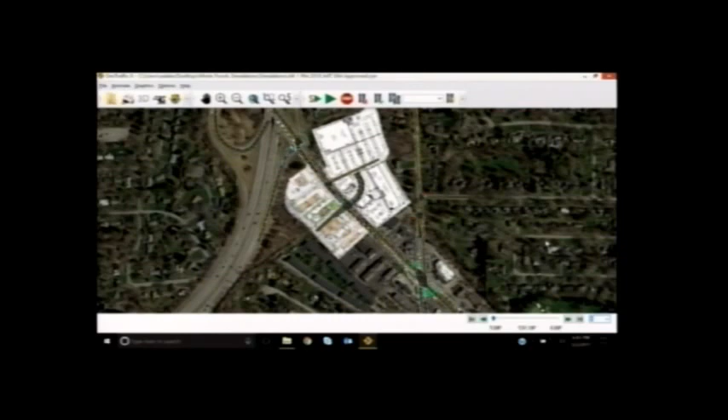What this model represents, again, is the worst case scenario. It also represents a fully improved corridor with all of our proposed mitigation, including traffic signal, traffic coordination, and things like that. Just to put it in perspective for everybody, here's Monroe Avenue.

This is Clover Street. These are the cars here. Again, we can zoom in on this a little bit closer so you can see them. I was going to ask you to do that, Jess. I think it's still— you can.

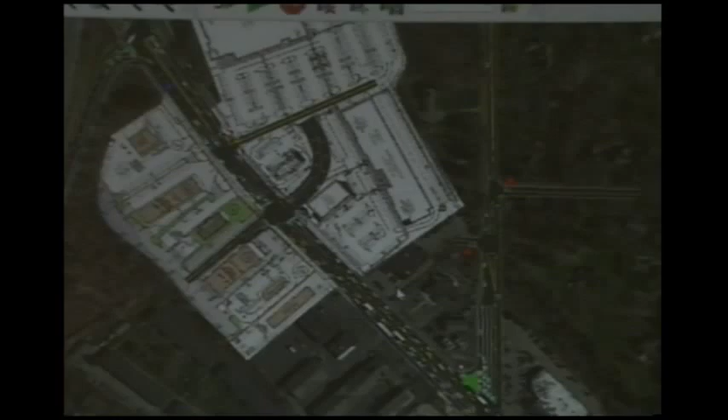This is our proposed entrance that comes into the Whole Foods Plaza. This is a proposed signal light, which we'll talk about in more depth. And then this is our second entrance out, which is a right out onto Monroe Avenue and also a left in. So this is showing you how the traffic will actually work once this plaza is built.

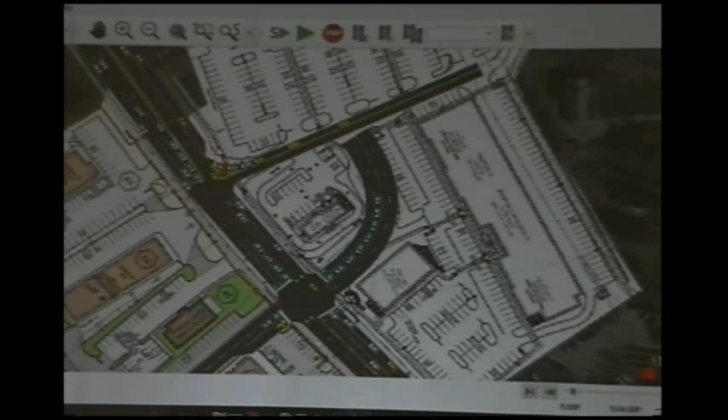Before you just say, all right, meeting over, I'll take your word for it, let's go through how we got there. So again, it all goes back to this malfunctioning signal timing. And I want to talk about what that really means.

Amy, we have a video from August 18th of 2016 of what it actually looked like. Just make sure you grab the movie file there, not necessarily the image.

So this is back in August 18th of 2016. We are starting to see some backup in this corridor. At this point, we have a malfunctioning traffic signal that is only providing 40 seconds of eastbound green time. So these folks here are only going to get 40 seconds. And what that leads to is ultimately this backup, and the reason for that is it only allows about 40 cars to get through that movement of the intersection.

What I'll talk about a little bit later, when you actually use the correct signal timing, you get closer to 63 to 65 cars able to get through that intersection. And that's just in one two-minute cycle, actually a minute and a half in this case.

When you apply that 20 cars per cycle that aren't able to move through here, the result accumulates. 20 cars this time, 20 cars next cycle, 20 cars next cycle. So it results in 800 cars during the actual peak hour that are not able to move through this corridor, and 800 cars is a lot.

Do you have a question, Mr. Supervisor? I just wanted to clarify when you say about 40 as opposed to 63, are you talking about just the eastbound movement on Monroe Avenue? Yes, sir, just the eastbound movement.

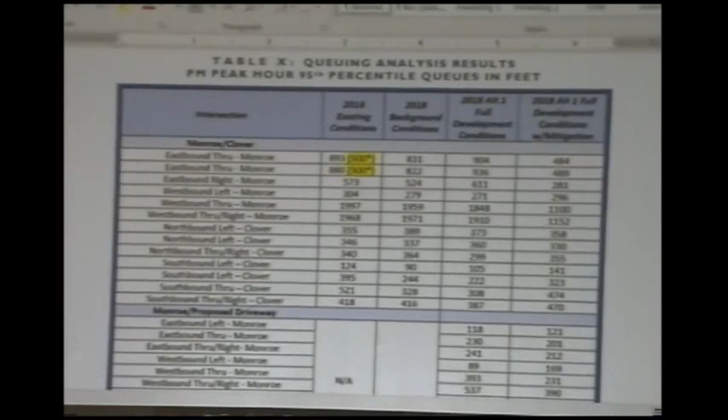So we go from 500 up to 900, but with our mitigation - which has signal coordination, the addition of the signal light, all things I'm going to talk about later - we have a very similar, and actually lesser, queue in that area. And again, that is at 5:18. It was drilling down to the minute.

So what we're doing here is trying to verify every way possible that this model is correct, this model is correct, because everything we go from here is going to build off this baseline condition. And the baseline condition was really the crux of the whole discrepancy back in 2016. So it was of the utmost importance that we made sure this was right.

So eventually it was agreed upon by the town's consultant that we did have all the correct parameters and we were representing the existing conditions correctly with our model. So what that allows us to do, I'm sorry...

Jess, I'm sorry, my eyes are straining to see these numbers. You referenced the 500 number with the asterisk in the 2016 existing conditions. Can you explain, because next to it are numbers 893 and 880, and then background condition numbers? I want to make sure everybody understands what those numbers mean, since that chart is in your SDEIS.

Mr. Supervisor, this is yet another example of how conservative our model actually is. The existing conditions model says you're getting queues out there of 900 feet, but when we go out and count them, we consistently count 500. So Synchro and SimTraffic are very conservative when estimating queue lengths. It estimates 893, when we actually physically monitor it day after day, it's really closer to 500.

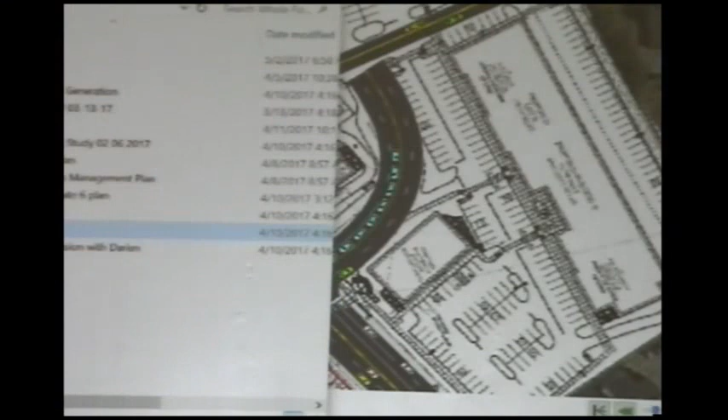So trip generations - how much traffic does our project generate? There's a very long and detailed explanation of exactly how we get to our trip generation number contained within the actual SDEIS. But really the best way to figure it out, and Amy will tell you this, and I'll tell you the same thing - if you really want to know what one of your proposed uses is going to generate, go find the most similar use in the most similar environment that exists today, and go count how many cars are going there.

What we've used in the traffic impact study is the Institute of Transportation Engineers manual that has set rates - there are 3 manuals, so every single use you could dream up has set rates, and that's what we've been using. One of the questions that came out in the review of the DEIS, I believe from several council members, was: I know you got this chart from this manual applied across the entire nation, how do I know these numbers are actually going to be accurate? How do you verify these?

So what we did, working with Whole Foods - and Whole Foods actually had some input on this - we said, where else do you guys have a similar environment to this? And they said, go take a look at Darien, Connecticut.

If you pull up the aerial, now we're in Connecticut, so I'm sorry if everyone north-south just got thrown off. This is the Connecticut Turnpike here, and this is a main commercial corridor that cuts right through this. And here is what's important, a standalone Whole Foods store.

Some people have said to us, well, what about the one they built in Albany 2 or 3 years ago? Well, that's in the middle of a plaza, and there's no way to actually determine how many cars are going to just that use when everyone's using the plaza. It's like trying to figure out how many people go to Black and Blue down at the Pittsford Plaza. It's tough. But what we try to find is, what's the most similar? In this case, we have very similar demographics.

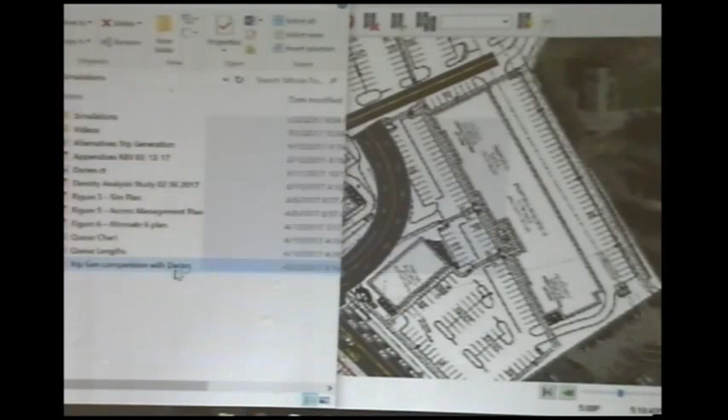So let me show you the next step here. All right, this chart's important, so I'm going to spend a little bit of time on it.

Jess, if I might, in comparing Darien to Brighton here, what about mass transit and public transportation in Darien versus Brighton? Is that taken into account? It's taken into account in terms of a lot of similar opportunities for mass transit, but not used like it would be in a more urban environment.

One of the things that was suggested to us was, why don't you go look at Wegmans on East Avenue? Well, when you start to get into those more urban environments closer to city centers, mass transit is used a lot more. One of the reasons why Darien was more appropriate was because it wasn't directly next to a large urban center. It also wasn't super rural either. So its proximity to really metropolitan areas played a role in our selection, because of things like mass transit, pedestrians, and so on. So in that sense it was.

Public transit would be similar then? Correct. To what we have in Brighton. And used at a similar rate, more importantly.

So this top category is the trips that were generated by our proposal, used in our traffic impact study based on the ITE manual. So we say we have a 50,000 square foot store, then we have AM, PM, and Saturday peak hours. During this presentation, we focus on the PM peak hour because that's really the worst case scenario.

That's when you have all the commuter traffic built in, but the study includes an analysis of all of them. So if you want to look at Saturday or the AM, it's not as exciting because there's nowhere near as many cars on the road, but we can certainly do that. We want to be looking at when the most cars are on the road, not necessarily when our project's using the most. But all of that is included in the traffic impact study.

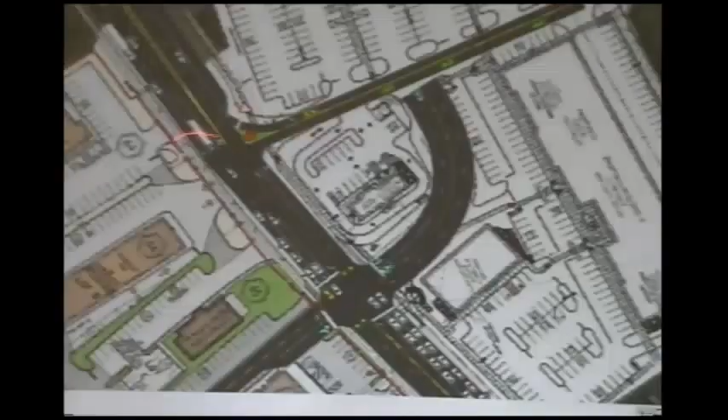That's going to help the entire corridor all the way up to Westfall to make sure traffic is flowing much more smoothly. This area represents the introduction of a traffic signal. As was the case with the original DEIS and continues to be the case, the project meets the traffic volumes for signal warrants, so a signal is warranted to allow safe passage of vehicles into and out of the site in a controlled environment.

A year or so ago, when you had Mario's Restaurant, Clover's Lanes, Mama San's, and the other uses that were in there, if you were to actually do the study and look at the amount of traffic they created - and this information is included in our TIS - they also warrant a signal. So this signal has always really been warranted for the safety of these folks, and continues to be the case.

What you see here is our revised access point that comes into the site. It's got a full 2 lanes coming in and a full 2 lanes going out. One of the things we've done, and I'll spare you a great amount of detail, is we've eliminated a lot of these internal curb cuts that once existed from the original DEIS.

That basically ensures we don't have an internal gridlock scenario. There used to be a curb cut right here into this pad site, so if you were coming in here and decided to take a left, and this car had to wait behind you, and they had to wait behind you, and then these guys were backed up, you could create a gridlock situation. We've eliminated that to make sure there's a much smoother traffic flow interior to the project.

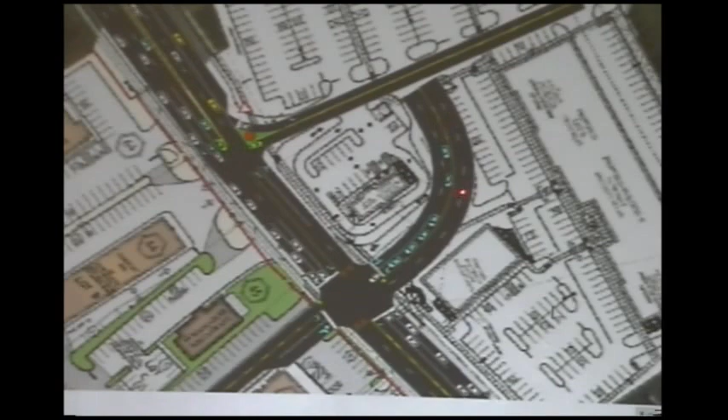Jess, can I stop you there for a moment? Absolutely. Looking at the numbers on the right, I take it this is at about 5:38, 5:37 on a weekday. More or less correct.

For over a minute, as I watched that simulation, and continuing now as you continue to roll, I have not seen a single car come into the left turn, the signalized left turn, to turn into the Whole Foods here, in that lane, correct? That's a good segue to talk about our access points, if you don't mind.

I'm going to get there, although it might be a touch indirectly. For starters, I just want to point out, this goes without saying, it's represented in our documents: these are only 2 access points. There's no proposed access to Clover, and there's no access going up to Allen's Creek. We've represented that before, and that continues to be the case.

We talked about this position, this access here. What we have here is a right in or a right out, so you can't take a left out of this project. We're going to talk a lot about how dangerous unprotected lefts are, but you can take a right. You can also take a left into the project here.

One of the reasons why - there's a lot of conversation with the DOT where they said, why wouldn't you just prohibit lefts here, don't let them go here, and make them all use the light? Well, the reality is the gaps created off of this light are ultimately utilized, and these folks get a chance to make a left-hand turn into here without having to travel all the way down to the signal light. So if you're looking for them to take a left here, one reason you may not be seeing them is because a lot of them are escaping and taking a left in up here.

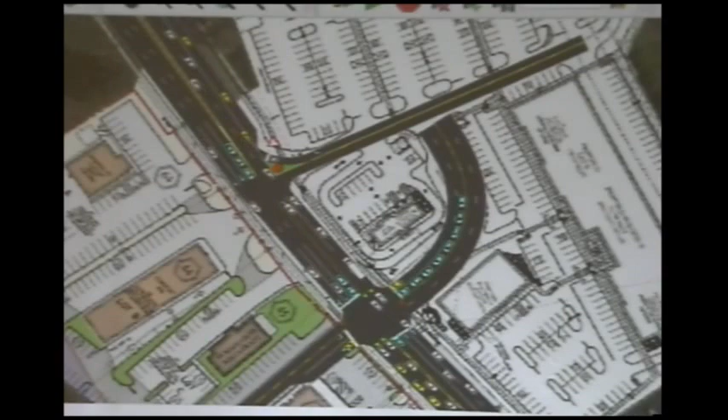So I don't know if you can zoom out for a little bit, Amy. One of the things I want to point out here, one of the main things that's been called and referred to, and it really is an amenity, is the development of an access management plan. I just wanted to reiterate on that.

What the access management plan is, and it was originally presented in the DEIS and continues to be proposed as part of the SDEIS, is the introduction of cross-access easements and drive lanes for all of these properties on the south side of Monroe Avenue.

And the situation that you have now, if you remember earlier, there was a car that tried to slip out and take a left. Well, what you have is all these uses right now, what used to be Friendly's and now is going to be a City Mattress, Socorro Home, Dunkin' Donuts down here further, but all these different uses have uncontrolled curb cuts.

So everyone, if you want to take a left, you sit there and put your blinker on and you wait and you wait, and then you try to shoot the gap when you can. And if we were even to try to model that in Synchro, we never could, because real life drivers have a lot more courage than our little simulated drivers here.

So what the proposed access management plan does is it proposes significant construction improvements to allow all of these five properties here on the west side, which we're calling phase 1 of the access management plan, where we actually have signed easement agreements, part of the DEIS and the SDEIS, giving the ability to say, okay, if I want to take a left turn, I can go over to the signal light, wait for that to give me a green, and then take a left without having to try to get through these gaps. So that's very important. That cuts down on the amount of really dangerous traffic movements.

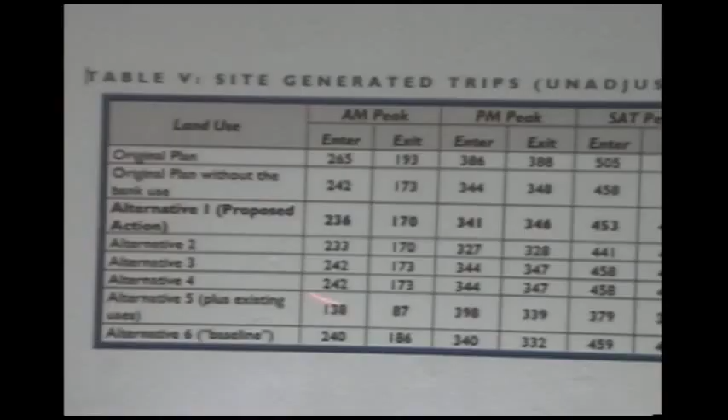Right now it's being referred to as the baseline. When you read through the SDEIS, both council members and members of the public that are here today will see Alternative 6, the baseline, which is really what we could build in this district given the density requirements of 70,040 square feet. What I'm going to do is pull up a site plan, which you're going to notice looks remarkably similar to our proposal, just to show you how similar they actually are.

Even here, when we look at the trips, 341, Alternative 1 is our proposed plan, versus 340, 346 versus 332, 453, and in this case higher, 459, 456 for 4.

All these numbers are showing you that when you go up 20,000 square feet, the resulting amount of traffic generated by this project is not substantially different. So if I'm not exactly in favor of this project, I'd say, how can that possibly be? That's crazy. Well, it goes back to the types of uses being put in there, and the fact that we're not putting in the highest trip generators. Does Whole Foods generate more traffic than a mattress store? Yes, it does. But it's still not the really big high trip generators.

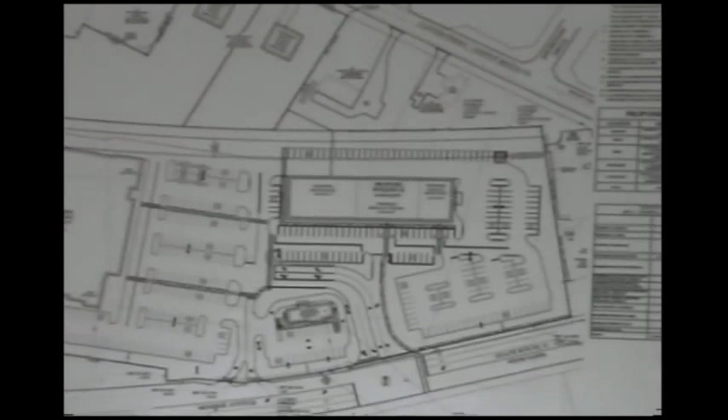If you pull up the site plan there. So this is our alternative plan included in the SDEIS. This is our baseline condition, what was analyzed. We've adjusted the site plan, actually moved things. We still have a 50,000 square foot building as a grocery store. We've jostled it around so it meets all the setbacks.

What would this look like if we actually applied the BF1 setbacks? For starters, this building can't be up close to the right-of-way, which in a lot of urban planning we want, buildings closer to the right-of-way with parking in the back. But if you just apply the zoning as is, you move this building back, the pad site, you move the 50,000 square foot building back, you still have the pad site. Now you have all this parking out front, which you wouldn't necessarily want. We still have our building back here, smaller than it was.

But then when you look at the different uses this could be—whether a restaurant, a bank, a bowling alley—those types of uses can all generate more traffic. So that analysis is provided within the SDEIS. That's actually a more thorough analysis than was initially presented in the first DEIS.

Really the intent of this plan was to say, if we weren't allowed to have more than the density requirements—or if we found through this process that it wasn't appropriate—what would be the next logical proposal? This is that next logical proposal, but it doesn't get you the access management plan, the coordinated signal timings, or a lot of the off-site pedestrian upgrades we're proposing. But it is the baseline condition we were required to analyze as part of the scope of the DEIS.

Jess, can you describe what assumptions were made about the uses for the pad as well as for the retail building? I presume the retail building would still be a Whole Foods. Yep, that's correct. And the pad out front would still be what we call a quick turnover restaurant—a Starbucks. My understanding is the applicant has a lease agreement with Starbucks, so yes, this is still planned as Starbucks.

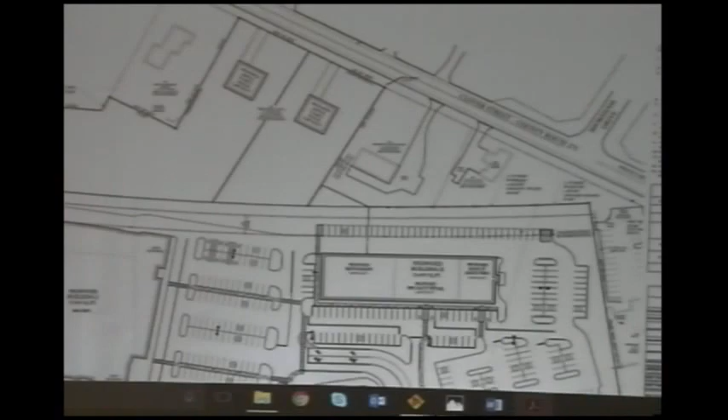Okay, can you zoom in on this, Amy? Then we looked at an end cap restaurant, comparable to—actually smaller than—the Mario's that was once there, very common for these types of plazas. So we looked at a potential end cap restaurant, and then a small bank with a drive-through on this side. In the middle, it continued to be the same retail proposed for the entire building as part of the application. So we swapped out, or looked at, a restaurant and bank that are still relatively small—an 8,000 square foot restaurant is pretty small, a 4,000 square foot bank—instead of just applying the retail component to that part of the plaza.

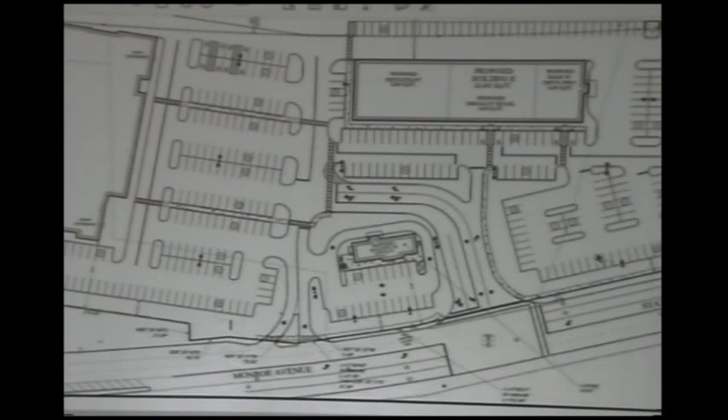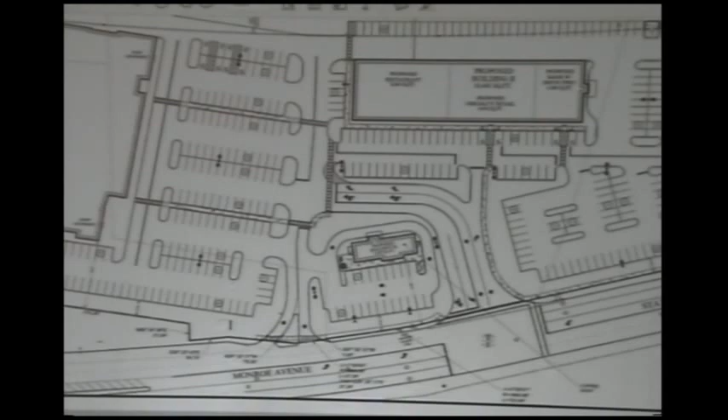Going along, one of the other things included in the SDEIS—pardon the quality on this—we looked at whether it's unreasonable to ask for 19,600 square feet more than what's allowed by code, given the amenities we're asking for. One of the things we started to do is look at our surroundings—is this compatible with what else is going on in the corridor, with other land uses and developments that have occurred? Amy, can you bring that up and scroll through it real quick?

What size is that Whole Foods? Same size, 50,000 square feet. The Whole Foods building footprint is exactly the same.

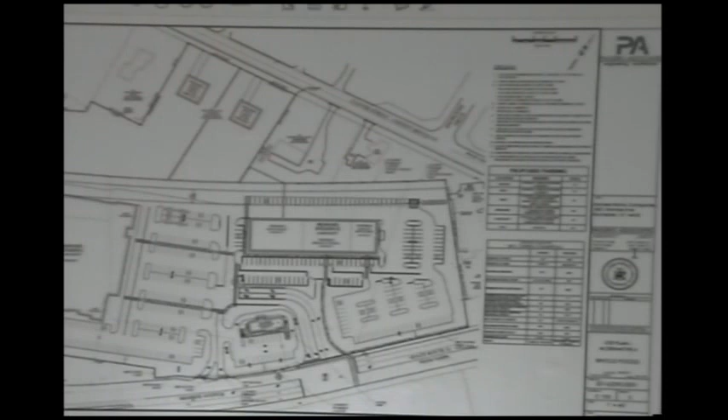We just moved it back and around to meet the setbacks. There's a building here that was eliminated, and we still have that there. So again, it's not substantially different. 20,000 square feet on a 70,000 square foot project isn't like we're going from 70 and asking for 200. I think this plan does a good job of showing you that the project at the end of the day isn't substantially different.

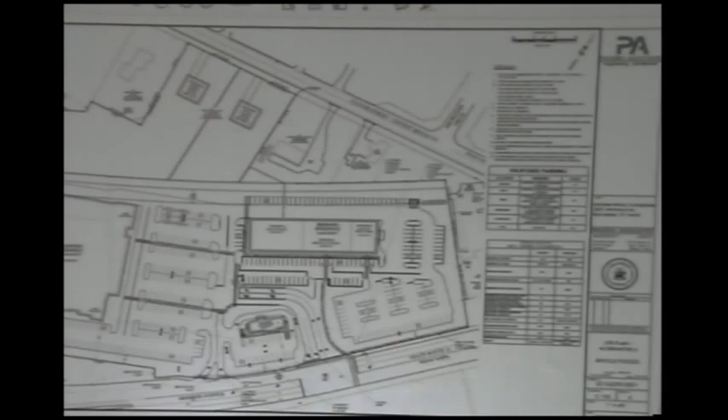One thing I want to point out, as some public comments noted, is that you would require a special permit to exceed 20,000 square feet in this zoning district. Yes, of course, we're fully aware of that, and that's why the special permit process is in place. As long as you meet those standards, a special use permit could be issued.

The scope of the DEIS does not say you need to analyze a baseline or alternative that doesn't require a special use permit. It says you have to analyze an alternative that meets the density requirements, 70,400 square feet, which is what this does.

We're not trying to say—most of these are pre-existing uses that have been there a long time. They weren't necessarily approved recently by this board, but it goes back to compatibility: what does our project look like in the grand scope of this corridor? The results are, I don't want to spend a lot of time on this, that we are consistent, in many cases less.

So that's basically the gist of the presentation. Just in conclusion, the real reason why we got into this supplemental draft environmental impact statement was the malfunctioning signal light at Clover and Monroe.

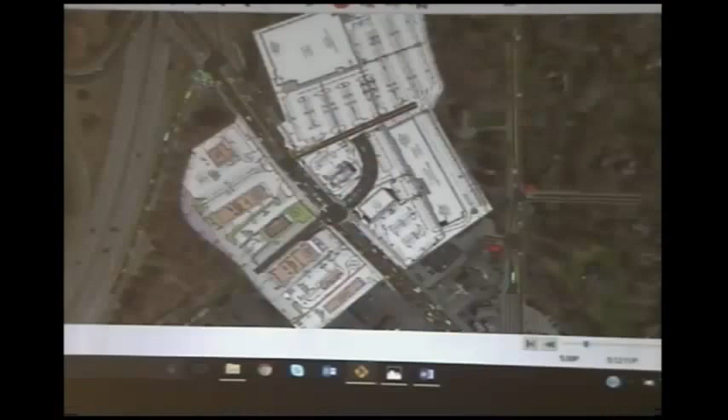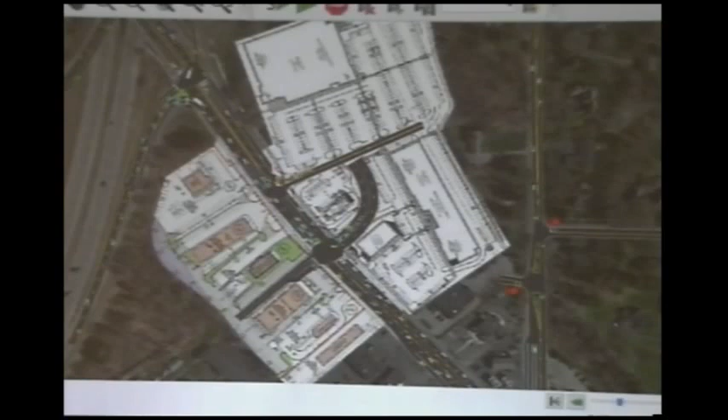We spent an exhaustive amount of time working with town staff and the town's consultants to make sure we really drilled down and nailed that baseline condition, including the state DOT. I think the end product, the revised traffic impact study, is substantially more accurate now that we have that accurate information, and now that it's experienced a thorough vetting of experts on both sides of the aisle.

I want to say again, time and time again, we have erred on the side of being conservative. We are looking at 5/18, the most critical possible moment to really analyze that and carry this across. Our simulations, which give us the results published in the TIS, are based on settings that say my car is going to stay at least 40 feet away from your car, and only travel at 25 miles an hour. Those aren't necessarily the exact numbers, but the settings were always erring on the conservative side.

That's why if you count the number of cars that shoot through with a 57-second green time, you're going to get somewhere around 56 to 58. But we know in reality it's really 62 to 64. Even with the lower, more conservative number, the results of the SDEIS still show it's operating at a condition that's improved compared to what's out there today.

A big part of that, again, is signal coordination, getting the corridor coordinated. I mean, that's big—you call it smart traffic, there's other names for it. But that's really an important part to making sure this thing functions effectively.

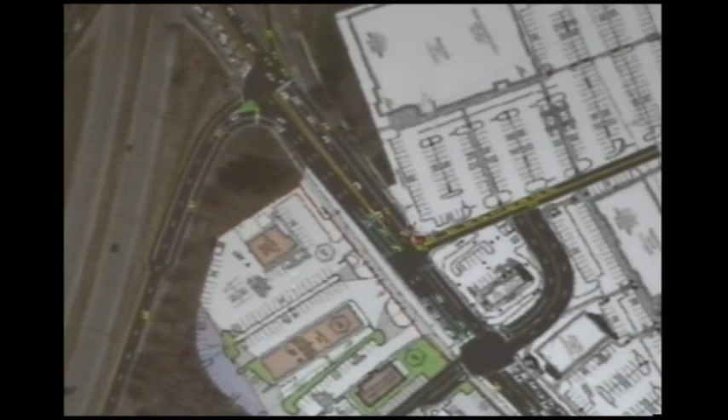Yeah, because I ask partly because, yes, I'm concerned about traffic flow on Monroe Avenue, but I'm very concerned, particularly based on some of the data in your original DEIS, although I know it is now mitigated somewhat through the change in your driveway configuration, but I'm also very concerned in making sure that people coming out of the plaza have sufficient opportunity to get out. And I want to see how that all works in this coordinated mode.

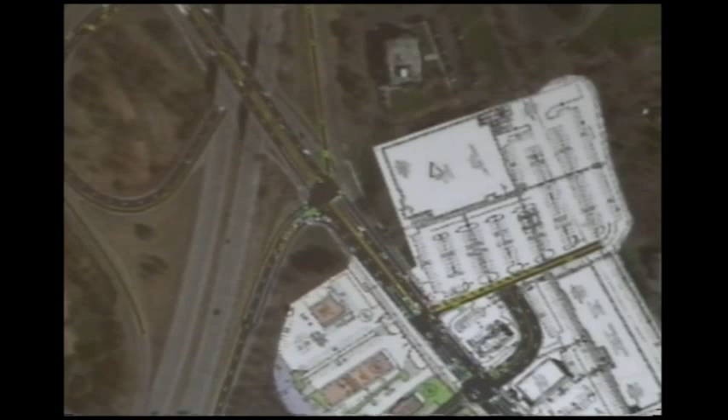Because based on the data I saw earlier, Saturday peak is really the most critical period, at least for some of the maneuvers. So the Saturday time period is higher for traffic exiting the site, but overall, when you consider the traffic that's on Monroe Avenue, the PM commuter time period is really the more critical peak when you consider everything and how it will operate. But obviously, we look at all three peaks, AM, PM, and Saturday.

In this, what you're concerned with, the traffic exiting the site is really more of a concern during the PM peak hour, because the eastbound traffic on Monroe Avenue is much higher during the PM peak hour than it is on Saturday. And it's more balanced on Saturday than it is during the PM peak hour. True. So we have a lot of eastbound traffic on Monroe Avenue in the PM peak and less traffic westbound during the PM peak on Monroe. On Saturday, those two flows are almost equal.

Yes, they are. Which makes the signal timings a little bit different during the two peaks, which is why we can coordinate the driveway with the 590 ramps on Saturday, and it's more preferable to coordinate the driveway with the Clover Street intersection during the PM peak hour.

Okay, if I can jump in quickly, as far as coordinating, now, you had said before that they're not coordinated now because the signal lights at the 590 interchange and Clover Street are too far apart, number one. And number two, the Clover Street cycling time is 135 seconds, whereas up at the 590 interchange, it's about 65 to 70. No, it's 80 to 100. 80 to 100, so they have to either be on the same cycling time or half.

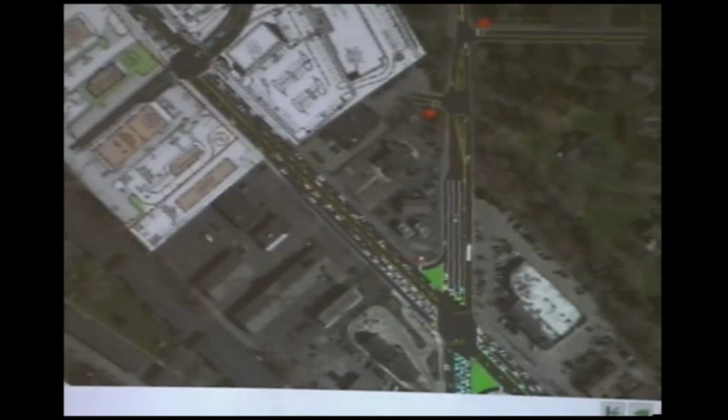So in the PM peak, which is really the concern for getting traffic out, because one of the concerns that DOT had, and I think the town had as well, is that traffic will back up on Monroe Avenue through the new traffic signal and not allow any room for traffic to exit the site onto Monroe Avenue, even when they have a green signal.

So the way we've coordinated these two traffic signals during the PM peak hour is that the traffic exiting the site will have a green traffic signal at the same time that the southbound Clover Street has a green signal. So what happens is, at that point, the eastbound traffic at Clover Street has flushed out to the point where it's not backed up to the site driveway, and there is space behind the queue on Monroe Avenue for the traffic to exit the site and fill into that space.

And then the next thing that happens is that the traffic in the eastbound direction at Clover Street turns green, releasing that, and then clearing the queue out.

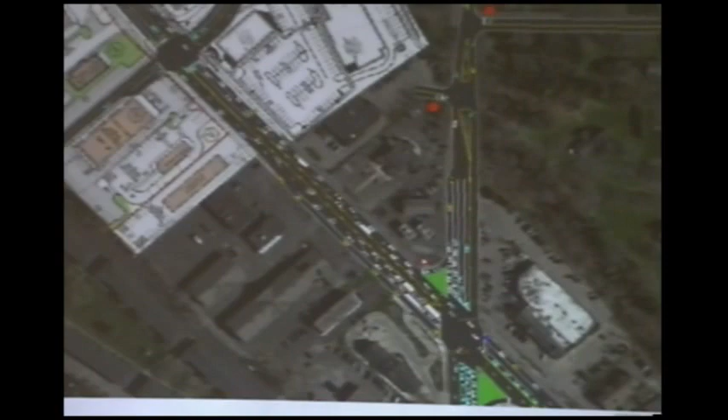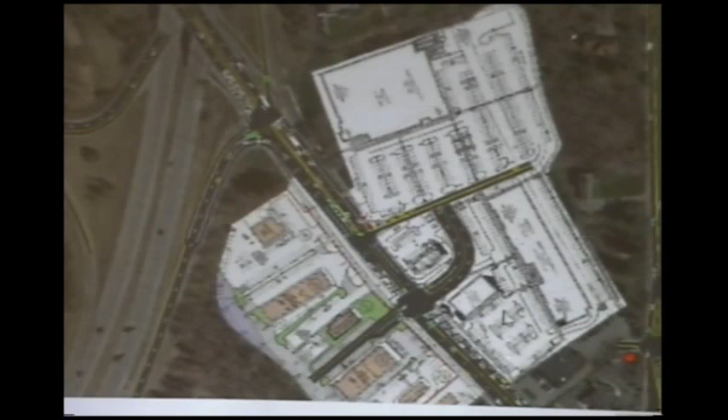Thank you, that's what I was looking for and I had gotten that explanation. Can you give a similar explanation of how the flows work on the Saturday morning peak when you coordinate between the interchange and the new signal? Presumably there was a thought process about traffic flow and egress that led to changing the coordination at that time of day. You indicated that east and westbound on Monroe are much more closely correlated on the Saturday peak because you don't have the business rush hour, the rush is really to shop at Wegmans and other retail establishments. But I'm interested in seeing the coordination between those two lights to make sure traffic is able to egress from the plaza.

Just to give you an example on the traffic flows: in the PM peak hour at the site driveway, the eastbound through traffic in the fully developed condition is 1,895 vehicles in the eastbound direction. In the westbound direction it's 1,764. And on Saturday it's 1,834 and 1,701. So we're talking about a little bit of a difference there.

How long does it take, if it goes out of whack, to fix? Meaning it's not synchronized, it's malfunctioning anymore. Let's talk about some out-of-whacks, because one scenario is when a pedestrian pushes the crossing button, either at the new signalized intersection or at Clover and Monroe, that changes the synchronized system. That's not out of whack, we want pedestrians to be accommodated, but it does change that synchronization.

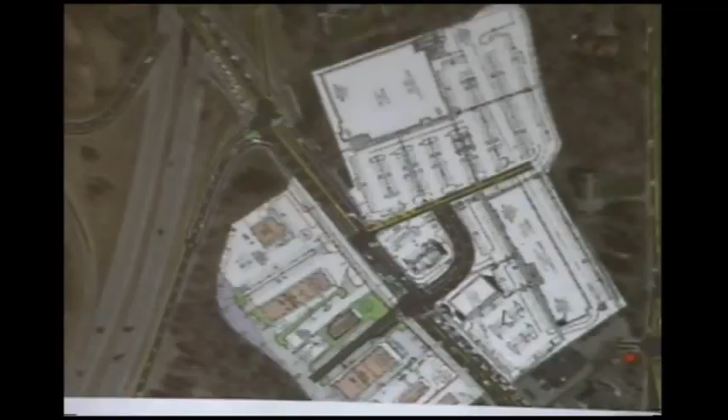So in that kind of scenario, can your model show that? And to the question, how long does it take to get back into sync? Pedestrians are actually built into the model, we do account for that. Usually it takes a couple of cycles, 2 to 3 cycles until it gets back.

So what happens is when a pedestrian pushes the button, that extends the green time. For example, if you want to cross Monroe Avenue at Clover and you push the button, that's going to extend the green time on Clover so the pedestrian can cross Monroe Avenue. The Monroe Avenue traffic is stopped, so they'll be stopped longer than normal. On the next cycle it has to catch back up. If it were coordinated with the signal at the driveway, what would happen is at the end of the yellow phase, the signals will talk to each other and say, we need to make sure the end of our yellow phase is back in sync, so don't give as much time to the side road next time. It'll take a cycle or two until that happens and it catches back up.

And that's all the pedestrian signal does, is extend the green time? It doesn't change the start of the next green time, it just extends the current green time? It extends it, yeah. So what happens is if you push the button and there's no green on Clover yet, you have to wait until the next phase for the green to come up on Clover. It'll cycle through the way it normally does, but then it'll make that phase long enough so you have time to actually cross the street.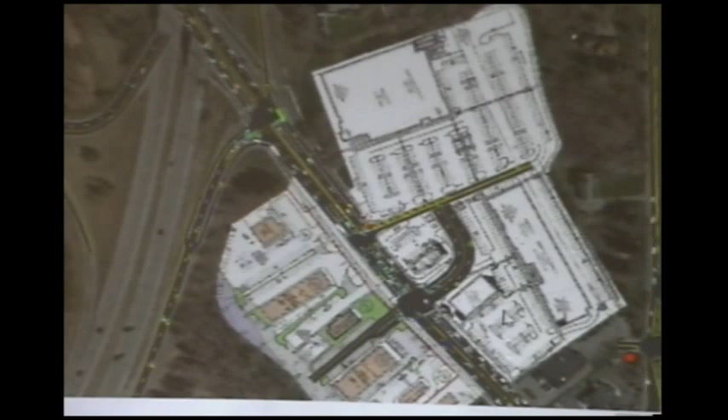That left in, though, can be interfered with by people exiting the site. Monroe Avenue traffic is being halted westbound when they're taking a left in at that first intersection. But the people coming out of the site toward the expressway, if they exit at the signal and turn right, they would be in conflict with a left turn.

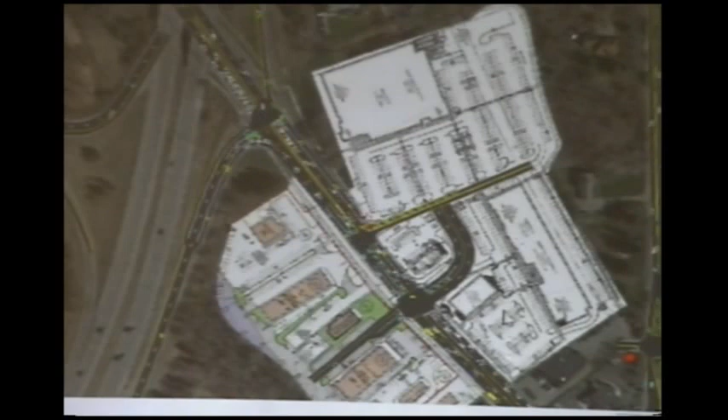We would expect that movement to be quite small, especially because of the way the driveway is located for the Starbucks pad and where Whole Foods is located. Those are the two primary uses on the site that are going to generate the majority of the traffic. So I would expect the majority of the right turns exiting the site to use the unsignalized driveway.

So is this what you're saying, that internally, the exit out of the Starbucks drive-through exits onto the driveway that exits to the unsignalized intersection? Yeah, and if you zoom in, that's what you see here.

One thing I mentioned earlier is that previously in the site plan submitted as part of the DEIS, there was a curb cut into the Starbucks back here, which had the potential to screw that up a bit. Now it's been relocated back in here so that people entering Starbucks and also people leaving Starbucks can slip out to the right with that right-hand turn.

One of the other things that can screw this up — or I can't remember the term Louise used, but it was a good one, not a technical term, but we all understand it — out of whack. Out of whack, yes, exactly. One of the other things that can make this area out of whack...

...are, in general, ingress and egress maneuvers from other driveways. I know that the access management plan, which is a good thing, limits those by encouraging those folks at those five locations an opportunity to ingress and egress from a signalized light. But those other driveways along and near this stretch of Monroe Avenue are still open and will continue.

And in particular, the driveway that I think probably causes the most difficulty is the driveway with the left turn into the Clover Commons Plaza, just to the east of Clover Street, very close to the Brighton-Pittsford town line. And that causes problems for a number of reasons.

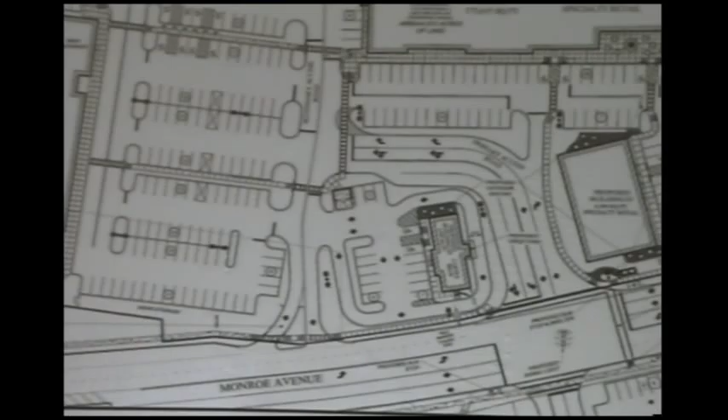This is a very important topic, and this question's been brought up before. The real answer, as the developer paying for the traffic study, we pay a lot of money. They do a traffic study, it shows results. I ask, are these results accurate? They say yes. Then we give it to DOT a year and a half ago, and DOT says wait a second, that doesn't reflect actual conditions. And I say, well, where's the disconnect?

Besides the malfunctioning traffic signal, the disconnect is that the DOT, by recommendation of the town's engineers, asked us to build in, in other words add, more cars that don't actually exist on the corridor. What that does is trick the simulation into accounting for things like the left-hand turn, the courtesy lefts that block traffic, so that when you're looking at the computer model it looks like real conditions.

So you have to, quote unquote, cheat the system by adding in extra elements. Call it more conservative, call it accounting for real-life conditions that the program isn't built to simulate, so that the end result looks like real results, as opposed to a model where there's never an accident, never a courtesy left, which isn't realistic either.

The model also takes into account things like the fact that there are bus stops out here, and the bus does stop, take on passengers and release passengers, and that affects traffic flow as well. So the model takes all of that into account, and then on top of that is conservative to account for driveway friction and that kind of thing.

In the proposal that's part of the SDEIS, it's all defined as specialty retail, so retail shops, and none of that stuff. And in the rear there as well, we're not talking about banks or restaurants back there, is that correct? You could, right? I mean, those would be permitted BF2 uses, correct? If we were to come in and propose a bank, yeah, but I would say that would all fall outside of the box that we've created for ourselves, which is this is the development proposal that's being brought forward. This is what's being analyzed. Any change to this, once the findings are complete, is really outside of, again, that box we put for us.

Yeah, and some of those uses are conditionally permitted, and they would require special scrutiny from the planning board. Correct, but as we know, so is a 50,000 square foot Whole Foods. I think the supervisor's point is, once the project is built, in years to come, those uses could change. I mean, what used to be down the street, what used to be Johnny Antonelli Firestone is now Applebee's, with a very different traffic generation. I don't know Pittsford zoning code, but presumably, however that area is zoned, would have permitted both a Johnny Antonelli's and now an Applebee's.

I don't know what you anticipate coming in here, but clearly, as we know, a restaurant use could be a use in the BF2 in that retail building. Correct, and if it comes in, it would require special scrutiny as part of the conditional use permit process, whereas the retail which is proposed would typically be allowed as of right and wouldn't require any scrutiny by any of the town boards. So to that extent, there would have to be further analysis of what the impact would be.

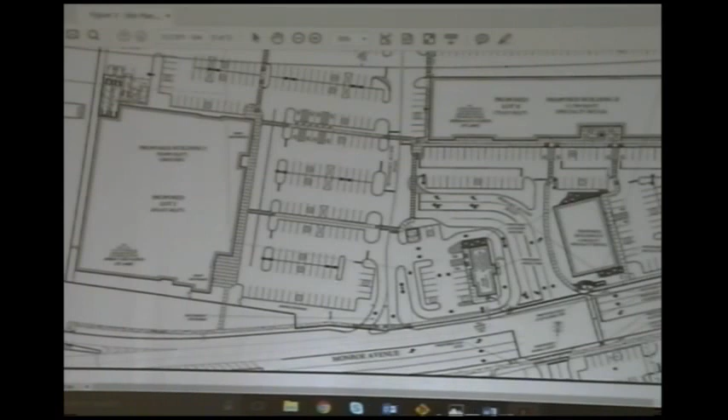As far as the ITEs are concerned, I understand how you generated the trip counts for Whole Foods, but for specialty retail, it encompasses so many different things. A restaurant may generate more trips at night, a Starbucks more in the morning, but this amorphous concept of specialty retail—is it men's clothing, office supplies? How do we pick a number to make sure the numbers we're using for this analysis are in the ballpark?

Yeah, the answer is yes, it really is all of those things. It's the typical type of things you'd find in the plaza, not unlike the Pittsford Plaza here. Once you get further east of Wegmans, there's a wide array of different types of uses, but at the end of the day they all have similar operating hours, similar amounts of turnover. They're all selling certain products—not food, not groceries—whether it's a ski company, computers, Verizon, or whatever. It really is all encompassing of those uses, and the way they generate the rate is by looking at plazas that have a lot of those types of uses, and they tend to be very consistent.

Do my colleagues on the board have any additional questions? I do want to note that Councilmember Vogel could not be here tonight—he's out of town. He did have the opportunity to view a similar presentation to see how the simulation would work, so I wanted to make sure people knew that Councilmember Vogel, although not here, has in general terms viewed this simulation model and had an opportunity to ask questions at that time.